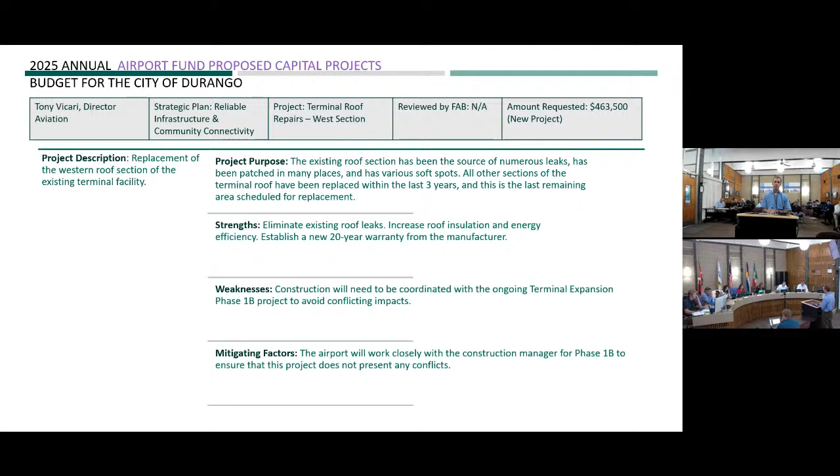Next new project is terminal roof repairs. This is the west section of our roof. The roof on the existing terminal building is basically 3 sections: east, middle, and west. The east and middle sections have both been fully replaced in the last 3 to 4 years, so we're moving on to the last section, the west section. That's an aging piece of roof, starting to see some additional leaks and other challenges, and we felt like this was an appropriate time for us to replace that membrane roof on the west section of the existing terminal.

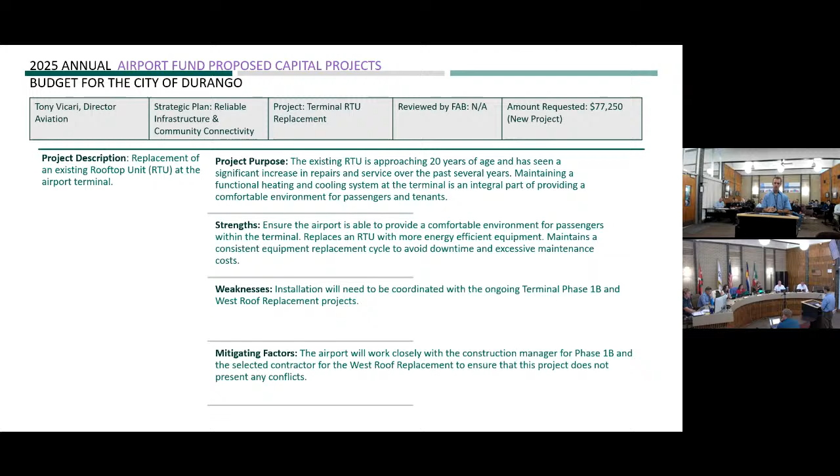Next up is the terminal rooftop unit replacement. Simple project—this is ongoing maintenance, or rather replacement, of core infrastructure at the airport. This is replacing a rooftop HVAC unit that is aging, close to 20 years of age, seeing increased issues, and received a recommendation from our outside contractors to ultimately replace that unit, continuing upgrade replacement cycles for the core HVAC systems at the airport.

Next is the fire station septic system repairs, continuing that trend of maintaining existing systems at the airport. We maintain a separate fire station and maintenance facility, to the south of the terminal. It's not connected to our wastewater system given the topography, and is on its own independent septic original to the 1992 construction of that building. It's aging and in need of replacement for the septic tank and leach field. This project would replace those and right-size them for the current occupancy of the building.

Last is the same facility, the aircraft rescue firefighting and maintenance facility at the airport - installation of fiber optic to that facility. Currently it operates off a wireless link for internet given its distance from the terminal and existing fiber. But over the last year we've seen fiber extended because of outside development, first to the La Plata County radar station at the airport, and most recently through an easement approved by council to a private entity, our fixed-base operator, pulling fiber to within shouting distance of the fire station. So we're looking to extend that fiber down there and bring better internet speeds and connectivity to that station, a critical place where the majority of airport staff, including security and fire personnel, work. That's the rundown on proposed 2025 airport projects.

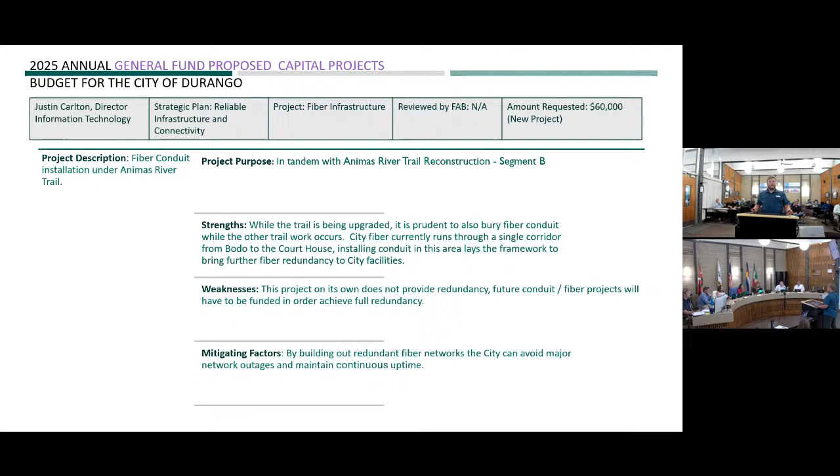Today, the wastewater treatment plant only has 1 physical fiber connection conduit coming in. And in all major city facilities, we try to provide redundant connectivity so that in the event of physical disasters such as a backhoe cut, the facility remains connected. So that's our recommendation for this project.

Moving on to the second IT project for 2025, our backup platform was installed in 2020. It has reached the end of its 5-year life cycle. So in 2025, it's our recommendation that we not only refresh this hardware, but we also go out to the market and look for upgraded capacity so that we can more frequently take backups, more securely take backups, and also investigate additional technologies such as cloud backups and offsite backup. And with that, I'll turn it over to Jacob.

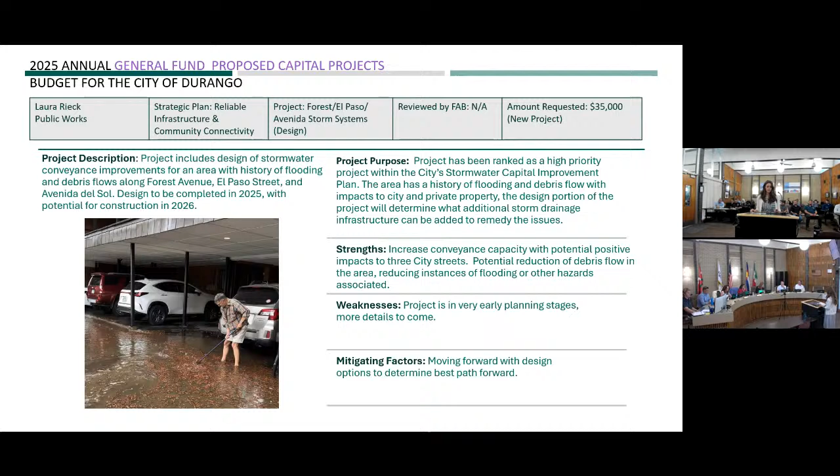Are there any questions about the general fund before we move forward?

So just real quick, we received an email, gosh, probably about a month ago, about a storm drain on Rio Vista. Will that be a part of, I don't know if that's even near the Forest El Paso and Avenida project. I've brought our city engineer with me for any stormwater questions, so I'll turn it over to Keith to answer that question. Good afternoon, councilors. I'm Keith Doherty, the city engineer, and no, Rio Vista is not part of that system.

Has that been looked at at all? Or is it just certain storms that impact that area? For this particular one, for the Rio Vista circle, no, I don't believe Rio Vista is on our 5-year CIP right now. Okay, but I can check on that and get back to you. Okay, thank you so much.

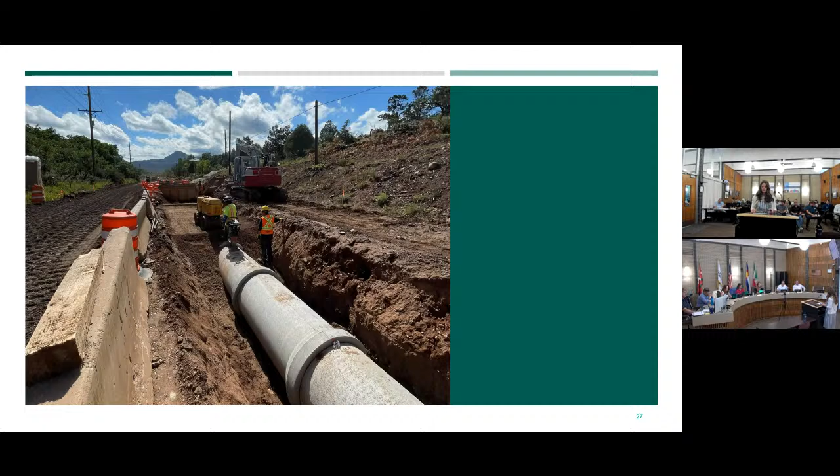Sure. Any other questions on the general fund from anybody? All right, okay, moving on. All right, 2019 Streets Fund summary. This is a picture from County Road 250, 251.

First is the maintenance transfer. This is a transfer of funds from the 2019 sales tax fund to the general fund to supplement operational expenses for the streets division of Public Works. Per council direction, this fund has been reduced from $1.7 million to $206,000.

The County Road 250-251 project is going to continue into 2025, starting construction back up in the spring after a winter shutdown. This portion of the project will begin reconstruction of the Metz Lane intersection and short sections of County Road 250 north and south of that intersection. The additional funding request for 2025 is to help cover the 10% contingency and 5% construction management costs that were not originally included in the project costs.

This project is jointly funded with the county. Their portion totals $4.4 million and will be contributed from the general fund. These funds will be used to pay the city for the annexation of the road, not for the road reconstruction, as general funds cannot be used for road construction. The general fund will then be reimbursed by the county.

This project has significant impacts to the traffic flow on a main thoroughfare through the city. So we will continue to work closely with the contractor and provide the public with the most up-to-date information for any changes to traffic patterns or any road closures that might occur.

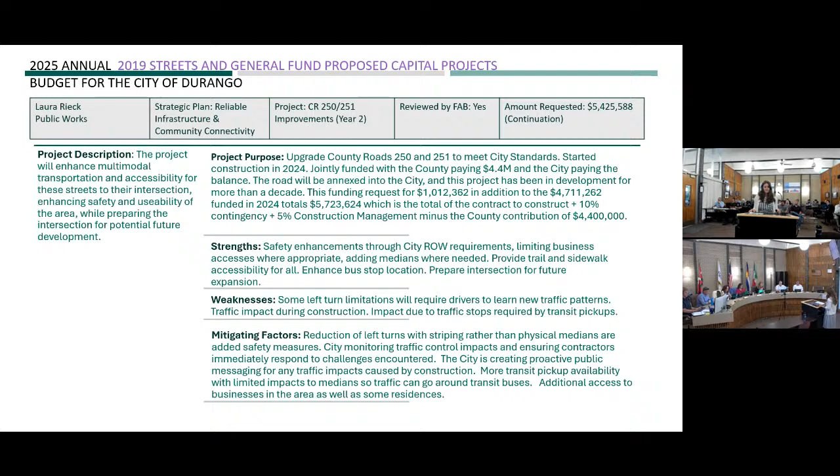Mill and replace is part of the annual pavement preservation program and includes milling and paving off of a road, usually 5 inches deep, repairing any areas of the road subbase that require it, and replacing it with new asphalt. The streets in Durango were recently analyzed to assign a rating using the Pavement Condition Index, ensuring that streets with the worst pavement condition are prioritized for projects. This program extends pavement life and reduces maintenance costs on the worst pavement condition streets. There will be some disruptions while the work is being performed, but the city will utilize proactive communications to inform the public.

North College reconstruction is also going to continue into 2025, starting construction back up in the spring after a winter shutdown, with the continuation of installation of stormwater conveyance and stormwater quality structures, sidewalks, traffic calming features, curb and gutter, and finally paving the road. Like the 250-251 project, it also has significant impacts to traffic, so we're going to continue updating the public with proactive communication efforts.

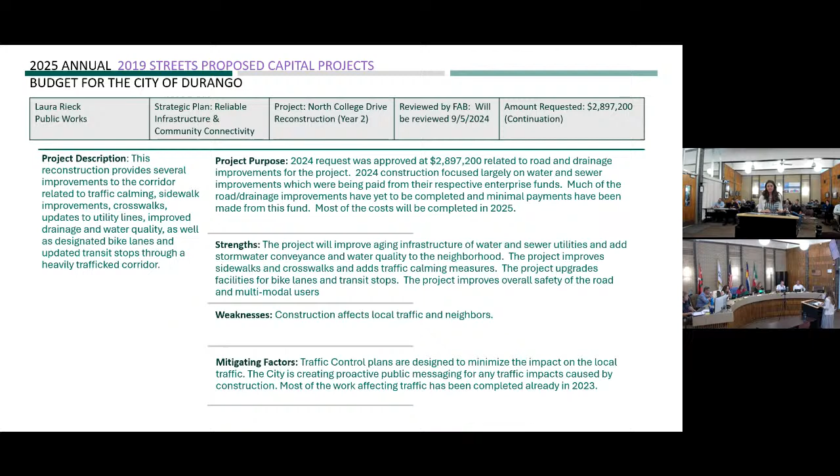Alley reconstruction and paving is an annual program for paving and repaving alleys that are either unpaved currently, severely damaged, or will be receiving drainage upgrades. The alleys are prioritized based on their condition, and this project is for paving only. Adjacent properties won't have access to the alleys while construction is underway, but we'll ensure impacts are minimized by working during normal business hours and using proactive public messaging to inform property owners.

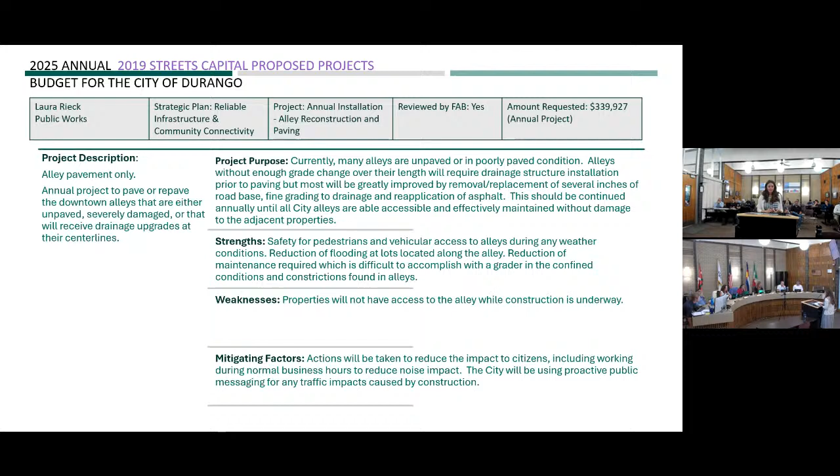So while the last slide was pavement only, this one is drainage only. The alley drainage contract is an annual program to install stormwater drainage structures in the alleyways to reduce flooding and damage to the alleys and increase safety for pedestrians and vehicles throughout the year. The alleys are again prioritized based on drainage conditions, and this one is for drainage only. Adjacent properties again won't have access during construction, but we'll keep close communications with property owners and inform them of the impacts.

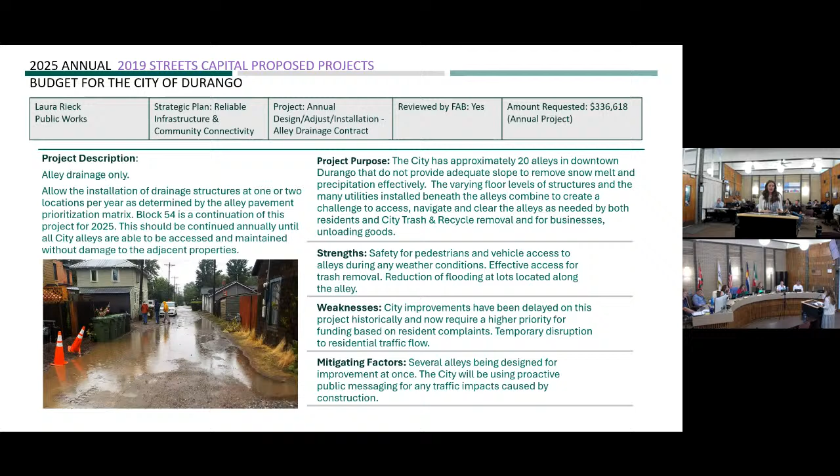Upon completion of the multimodal traffic calming features on Junction Street, approximately 2,000 feet of pavement will be milled to full depth. Any subbase that needs replacement or repairs will be repaired, and the pavement will then be replaced. This project is again only for the paving portion of the greater Junction Street multimodal project, and it has significant impacts to traffic because this is another thoroughfare in Durango. So we'll be using proactive public messaging to inform the public of traffic impacts, changes to traffic patterns, or potential road closures.

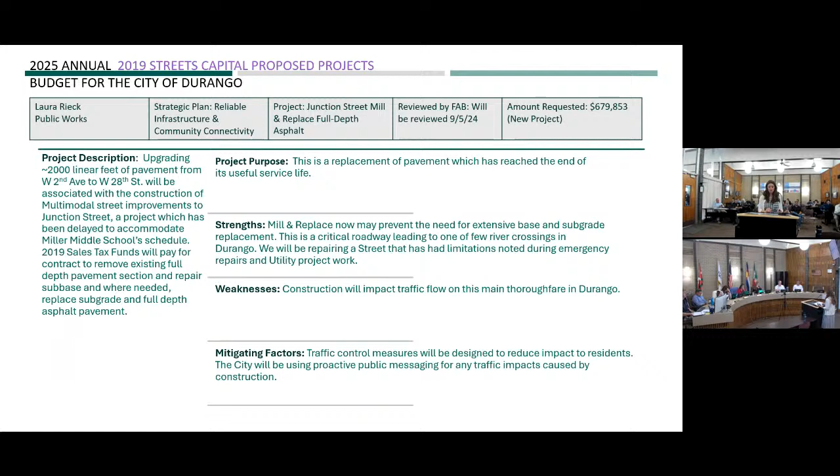The 8th Ave and College intersection and streets improvement project is part of another larger multimodal traffic calming project similar to Junction Street. It's a coordinated effort to group a paving project together with a multimodal project in sequence, which makes the project much more attractive to contractors for bidding. This portion of the project is for the intersection paving only, and it is a reappropriation of funds from 2024 with an increase in the requested amount due to increased costs for asphalt, as seen through multiple bidding processes. The multimodal team will discuss this project and its reappropriation of funds in greater detail during their presentation.

During construction of this project, again, significant impacts to traffic. It's a very busy intersection leading up to the fort. So, again, proactive public messaging will be utilized.

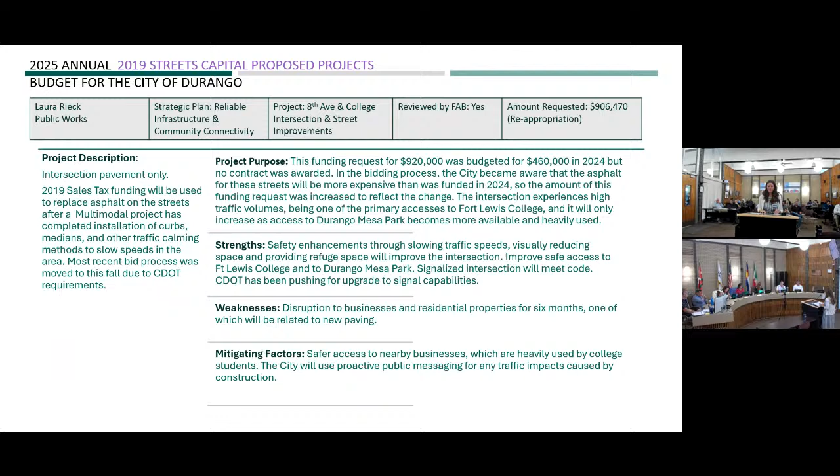This portion of the sidewalk improvement program is an annual program for repairs to privately owned sidewalks, previously known as the 50/50 sidewalk program. After receiving feedback from residents and council, Public Works will be presenting several alternatives to council moving forward for a larger scale sidewalk improvement program. This project will remain in place until a revised sidewalk program is considered and approved by council.

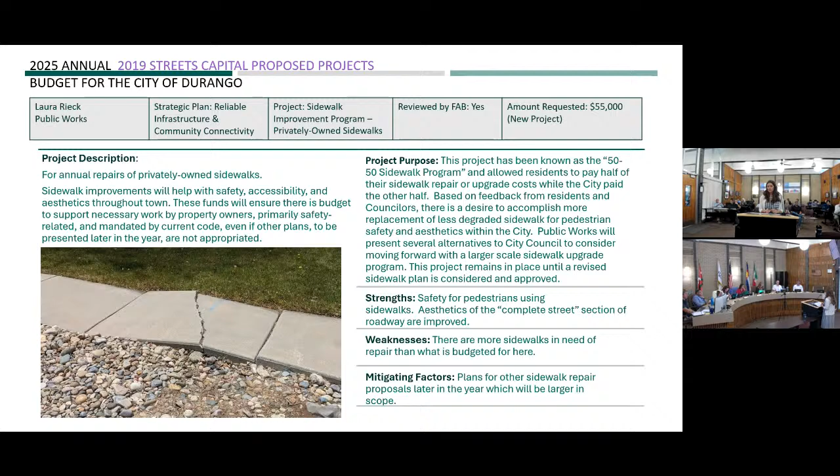Similarly, this portion is for city-owned sidewalks, funding annual repairs to sidewalks that are the city's responsibility. Again, after being presented with multiple options for a larger scale sidewalk improvement program, this will remain in place until one is considered and approved by council.

Annual seal coat application is part of the pavement preservation program, a preventative maintenance method which extends pavement life by reducing water infiltration, sun, chemical, and sediment damage. It's a primary method for pavement preservation due to the life extension per cost per square yard—basically more bang for your buck. Streets needing seal coating are prioritized based on the Pavement Condition Index, or PCI. There will be temporary disruptions while the seal coat is applied, but it's typically only 24 hours that you can't drive on it.

We'll work closely with the contractor for scheduling and ensure the public around the affected areas is notified well in advance.

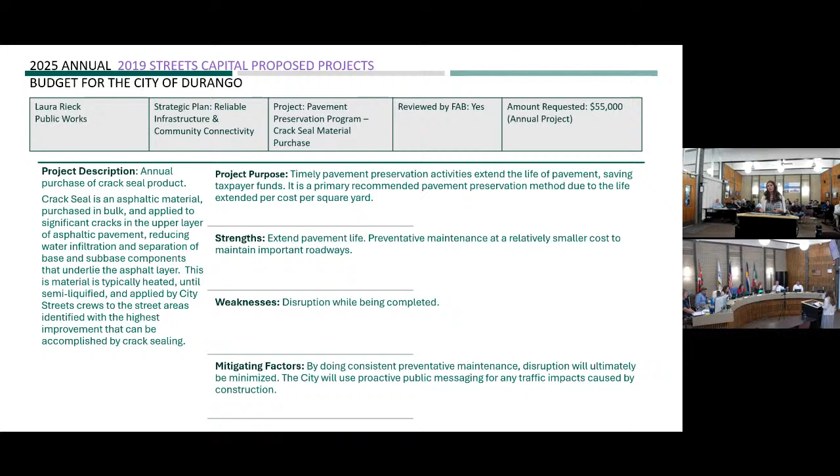Similar to seal coating, crack seal is a primary preventative maintenance method used to extend the life of pavement. This is an annual program to purchase and apply crack seal products to the streets as prioritized by the PCI, the Pavement Condition Index. Again, minimal impacts due to the areas affected, and we'll use public messaging to inform those impacted areas—very similar to seal coat, very temporary impacts.

This is an annual program for the installation of concrete ADA ramps. These installations take place in conjunction with pavement replacement projects, which are prioritized based on the PCI, and they increase safety for pedestrians and those living with disabilities attempting to cross the streets. While not all ramps in the city are being updated at the same time, this program ensures continual replacement of all the ramps in the city until they're all in compliance with ADA standards.

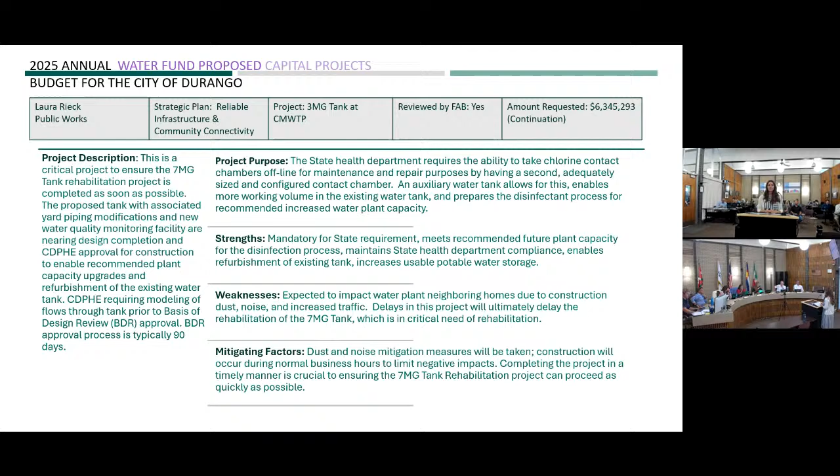And next, 7 million gallon tank rehab. As mentioned in the last slide, the 60-year-old 7 million gallon tank at the water plant needs a full rehabilitation. A recent comprehensive tank inspection revealed the interior coating in the tank is failing, which is a sanitary defect according to the Colorado primary drinking water regulations. This means it needs to be replaced as soon as possible to meet drinking water regulations.

The project is for the design of the rehabilitation and will include replacement of corroded internal steel structure, removal of the interior coating, performing any required repairs to the tank's interior, recoating the inside, and installing features to improve the tank's performance and safety, as well as bring it up to city tank standards. The design of the rehab can be completed in 2025, but the rehab can't start until the 3 million gallon tank is commissioned in 2027.

I should note that although the interior lining is failing, it does not mean that the water inside the tank is not safe to drink. There's intentionally chlorine residual inside the tank to help protect it. It just needs to be replaced as soon as possible because it could lead to corrosion, which could lead to a leak inside the tank.

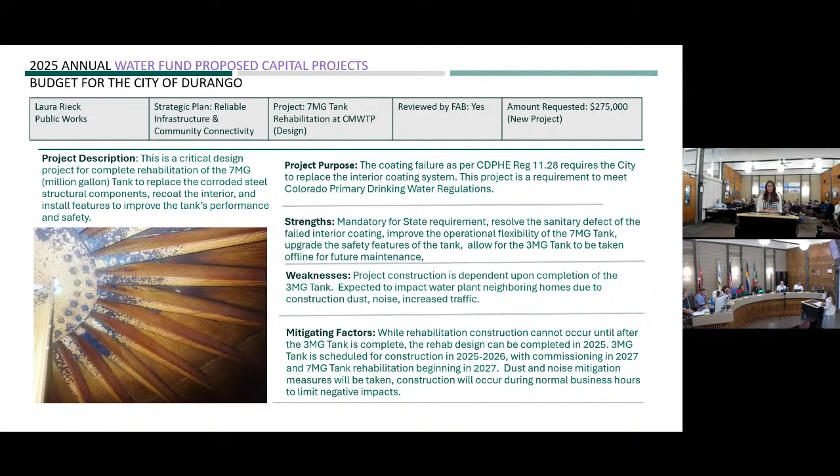Okay, it's the College Mesa Water Treatment Plant Train 1 improvements. The original treatment train was constructed in 1956. It's been online ever since, and it has reached the end of its useful service life. It's undersized to treat the water year-round without the help of the other treatment train, and the concrete structures are literally crumbling apart.

The 2021 Water Master Plan identified the need to expand the water plant from 14 million gallons a day to 21.5 million gallons a day to meet projected future water demands. Improvements to Train 1, or T1, can help achieve this by expanding sections of the treatment train.

And we've begun preliminary engineering and a feasibility study to determine how to best achieve improvements to Train 1 while maintaining daily operations of the plant, as it's the only water plant that we have and it can't be taken offline. This project will fund the design and engineering in 2025 and will outline the phasing for improvements moving forward.

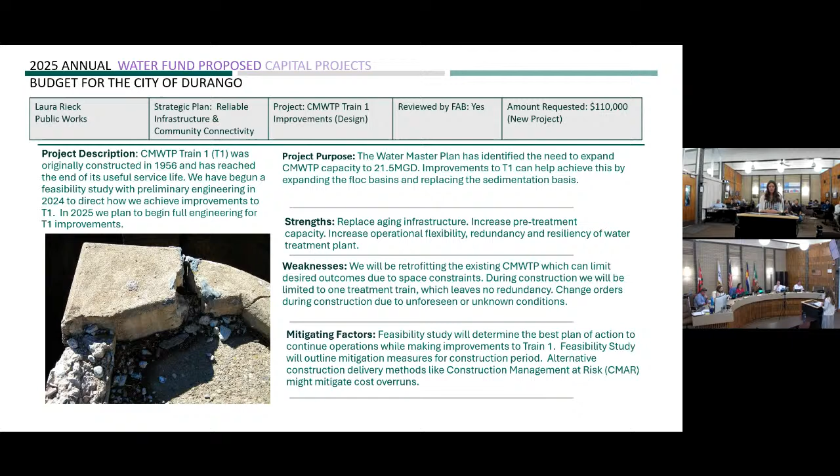Florida Pipe Rehab. Our drinking water comes from the Florida River through a 9-mile gravity pipeline. The pipeline was constructed in the early 1900s and has been replaced in sections over the years, with a section of wood stave pipe being removed just a few years ago. The pipeline is a critical piece of infrastructure that's aging and has experienced several breaks in the last few years, which have impacted our operations for as long as 3 weeks while the repairs were completed.

This is a reappropriation of funds from 2024 because the scope of the project has increased, not to just rehab a few sections of the pipe, but to complete an entire pipe conditioning assessment of the entire 9 miles of pipe to determine the worst areas, identify the pipe materials, as it's a bit of a Frankenstein with different sizes and materials throughout it, and to recommend the best methods for rehabbing the entire pipe so that we can ensure reliable delivery of Florida River water to the plant.

During the construction of the project, which is estimated to begin in 2026, the pipeline will need to be taken offline for rehab. So we'll be utilizing the Animas River as our source water for drinking water during that time, and we'll be utilizing the recently completed pre-oxidation system to help treat this water during the winter.

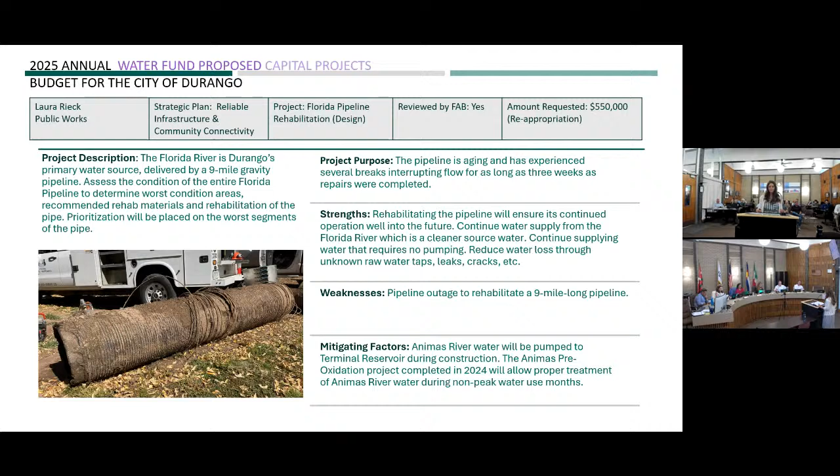The Florida pipeline runs through a drainage area in Edgemont Ranch, and over time, the earth covering a section of the pipeline has been washed away, exposing the pipeline and undermining the ground beneath it. This project will restore the drainage channel grade under the pipe and armor the surrounding areas to maintain soil over the pipeline and prevent further erosion from exposing the pipe.

The project will occur in a challenging area within this drainage channel, so the city and the contractor will determine the best methods to prevent further damage to this channel during construction.

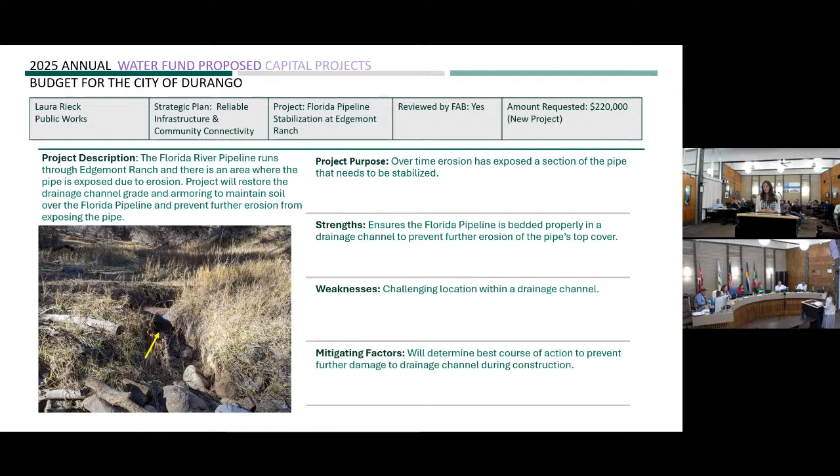The water line along Highway 160 was installed in the 1960s and is in extremely poor condition. We've experienced several breaks each year on the section between the 550-160 intersection and Tech Center Drive leading up to the Recycle Center. This project is a reappropriation of funds from 2024.

The original request was for $2.2 million for construction. However, the preliminary designs did not reach 90% before they were determined to be non-constructible due to the difficult location of the water line being underneath the concrete panel highway, in a congested utility corridor, in CDOT right-of-way, at the base of a really steep slope, right along the highway.

So a new design is needed to account for these challenges and to incorporate alternative methods of pipe replacement, and to ensure that it reaches 90% design for construction in 2026.

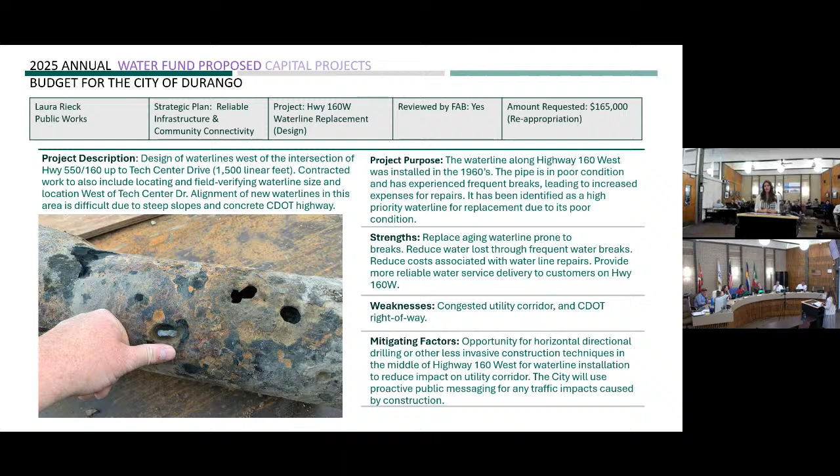This project is a continuation from design completion in 2024, with construction occurring in 2025. The Rockridge Pump Station was built in 1990 and has reached the end of its useful service life. The pump station is undersized and it lacks the necessary updated equipment to enable us to take the Rockridge tank offline for needed interior rehabilitation.

The 2021 master plan identified this pump station as needing to be replaced with a station with increased capacity, modern controls, and backup power generation so we can continue to deliver water even during power outages.

A new pump station is a prefabricated building that will be placed next to the existing pump station. It's going to include updated pump controls and communication systems that are standard in our other pump stations.

Construction will occur along a popular walking path and in the middle of a very quiet neighborhood, so this is going to impact the nearby residents. Again, typical noise and dust mitigation efforts are going to take place, and the neighborhood will be informed well in advance of the start of construction.

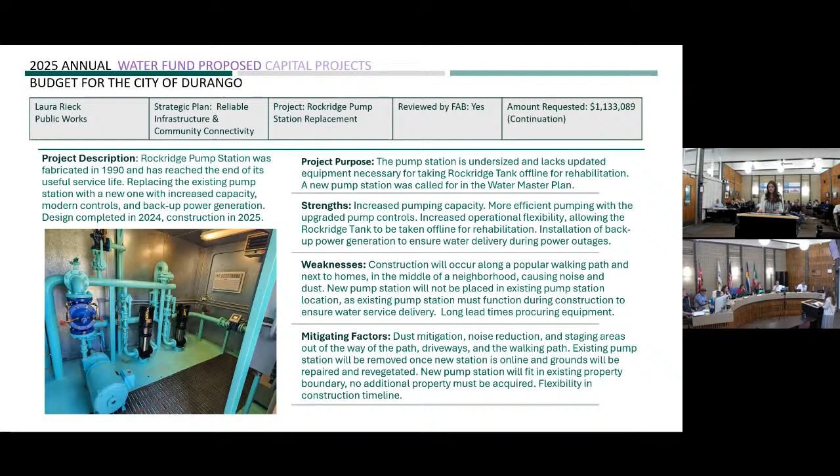Wildcat Tank needs full rehabilitation to meet drinking water regulations and to bring it up to the city water tank standards. Phase 1 of the tank improvements were completed last fall, which included the installation of an isolation valve halfway up to the tank and running power to the tank site.

A recent comprehensive tank inspection revealed that the interior tank coating is failing, which, like in the 7 million gallon tank, requires removal of the old coating, repairs to the internal steel structure, and recoating the inside.

Phase 2 will include full interior and exterior rehabilitation, as well as the addition of our standard tank components, which are a new safety ladder and cage, security cage, handrails and roof hatches, a tank mixer, sampling ports, level sensors, communications, a control panel, and power to run it all.

This project is dependent upon CDPHE approval of the design, and it's dependent upon the Twin Buttes developer upsizing the water main on Highway 160 from Tech Center up toward the gas station. This will allow us to take the tank offline, as this tank is currently needed to supply water to the Twin Buttes pump station to fill the Twin Buttes tank.

The developer is currently in the design process for upsizing the line, and the tank's rehab design is expected to be approved quickly by CDPHE because it's the same design as other tanks we've already done.

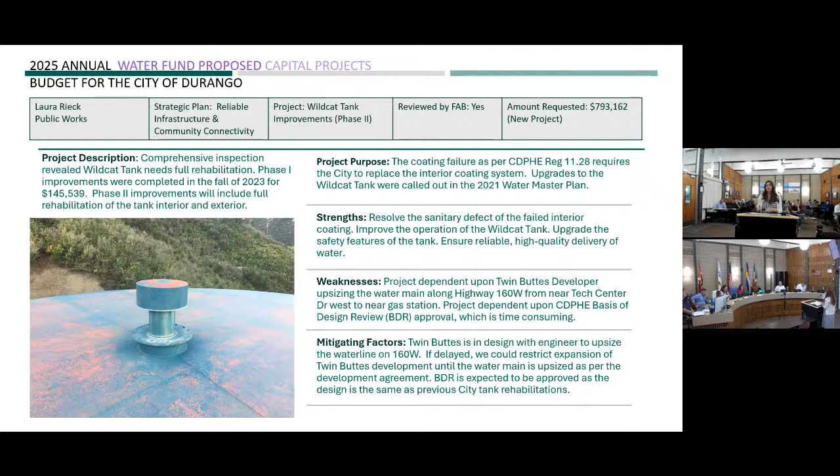Durango Mesa Park Access Road has a planned 8-inch water line running to the top of the mesa to supply potable water to the mesa. Public Works has the opportunity to upsize this main to a larger size, and this would support a future opportunity to loop the water system to Grandview Tank, which serves Three Springs and Mercy Hospital.

Looping this area of the water system would ultimately provide redundancy to a critical portion of our water system, which currently relies on a single pump station to deliver water to all of Three Springs. We'll need to analyze future pumping capacity needs based on our existing pump station and future potential equipment upgrades.

However, there's advantages to purchasing the pipe now because material and installation costs just keep rising.

Skyridge tanks are twin 10,000 gallon tanks that are buried on the hillside above the Sky Ridge neighborhood. They're just east of the above ground Hillcrest tanks. They are square concrete tanks and have liners inside.

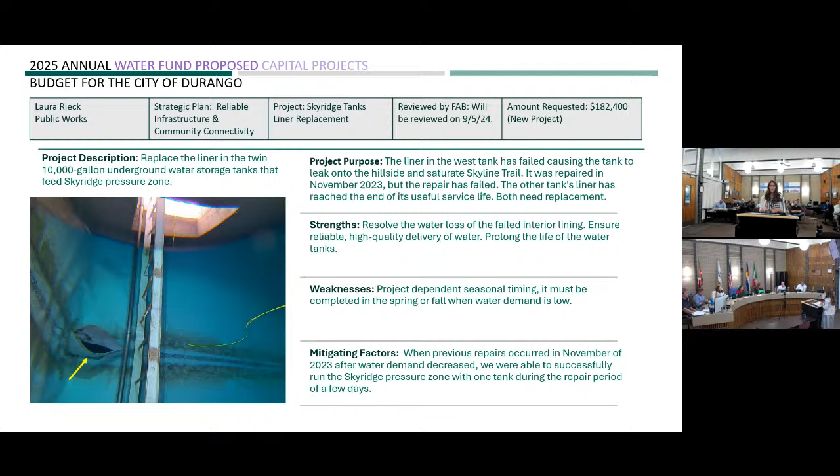The city's already under contract with Riley Industrial for tank repair and maintenance, and they're able to replace the liners early in spring of 2025 before water demand increases for next summer. The project is timely since we need to stop the leakage from the tank as soon as possible, but the work needs to be performed when water demands are low so we can take one of the tanks offline at a time.

Water fund questions? Yeah, just a couple, thank you so much. It's a ton of information.

The 3 million gallon tank, after the 7 million gallon tank rehab project is completed, will that increase our capacity, or will it be used as backup? There are multiple ways we can use it. We've engineered it so we can use it in any situation, whether just using the 3 million gallon tank, just the 7, or using them together. There's a design in place with inlets and outlets that allow for that usage, but it's also designed to create more contact time with the disinfectant. So whereas the 7 million gallon tank handles that right now, we'll be able to do it in the 3 million gallon tank because there's a maze inside it that the water has to travel through.

Thank you. Regarding the Florida River Pipeline, how long do we anticipate that project taking, since we'll be pulling from the Animas? For construction or design? Either one. I know we're not close on the design yet, but do we have a forecast? It's estimated design will be in 2025, construction in 2026. For the actual timeline where we'd have to shut the pipeline down, I couldn't say exactly, but I'd guess 1 to 2 months, depending on what method they use for the rehab. Okay, I figured it was probably too early to tell, but wanted to ask in case anyone was wondering.

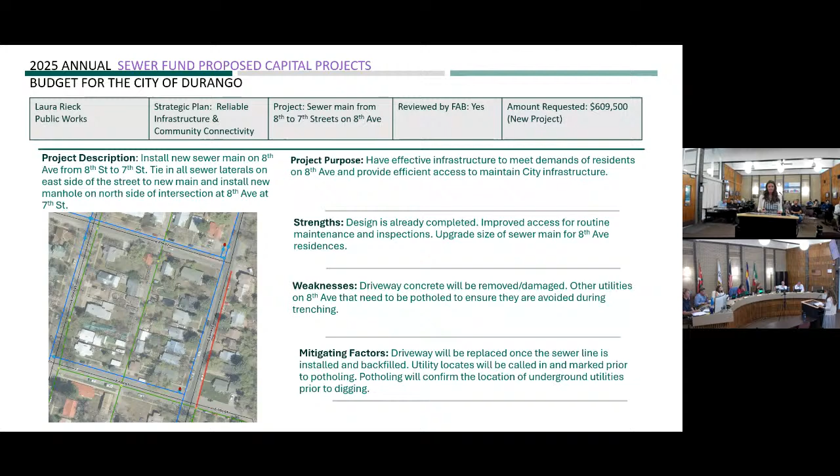From that manhole, the wastewater from Riverview neighborhoods and all along Florida is stuffed into a 6-inch pipe that flows west and north to the Island Cove lift station. This creates a bottleneck and can lead to clogging in the sewer lines.

The 6-inch line needs to be upgraded or upsized to a 10-inch to remove this restriction and allow for proper maintenance of the sewer lines, including rodding and camera work. It's going to reduce the likelihood of clogs and sanitary sewer overflows.

There are 7 mobile homes sitting right on top of the existing sewer line, so there's an opportunity to use alternative pipe placement like pipe bursting technology to replace the line going underneath those homes.

Their sewer service would, of course, be interrupted during this time, but the city has established mitigation efforts like offering rec center passes and providing temporary restrooms during construction. The affected areas will be notified well in advance and kept up to date on all construction progress, and the public will be notified of any impacts on Florida Road.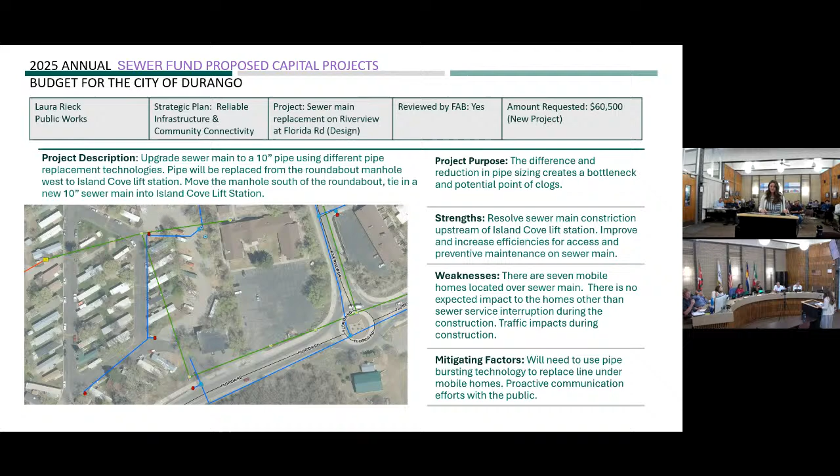The pumps that are too large, is there a way to downsize from 3 to 2 pumps, or do we need to go to a smaller pump? And are we going to keep those larger pumps to facilitate growth if need be? I'm unaware of what we're going to do with those pumps once they're taken offline, but typically only one pump runs at a time, and even with one pump online, it's too much. It's way oversized for the need that we have.

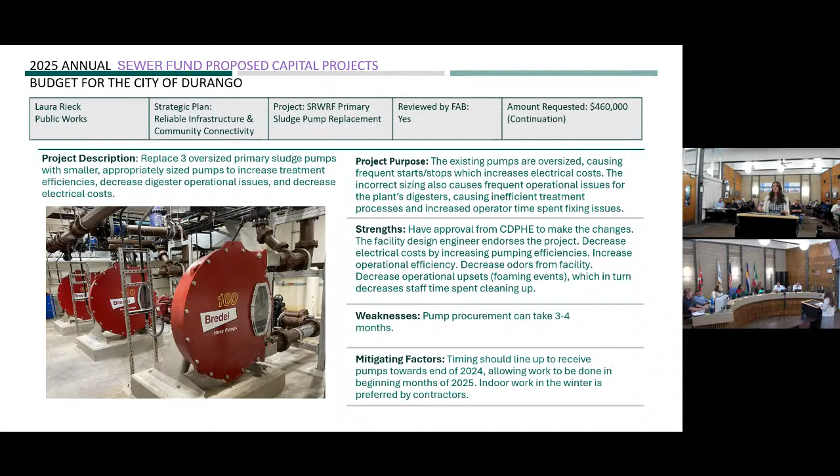And the concrete liner replacement, are we going to be able to recoup any costs from the company that installed it? Unfortunately not. The warranty for the original liner was only 1 year, which is typical for contractors. With Spectra Shield, the contract we currently have, the wastewater treatment plant manager went through a lot to make sure the warranty would last much longer than 1 year. I believe he told me it was 10 years, but we'd have to double check that.

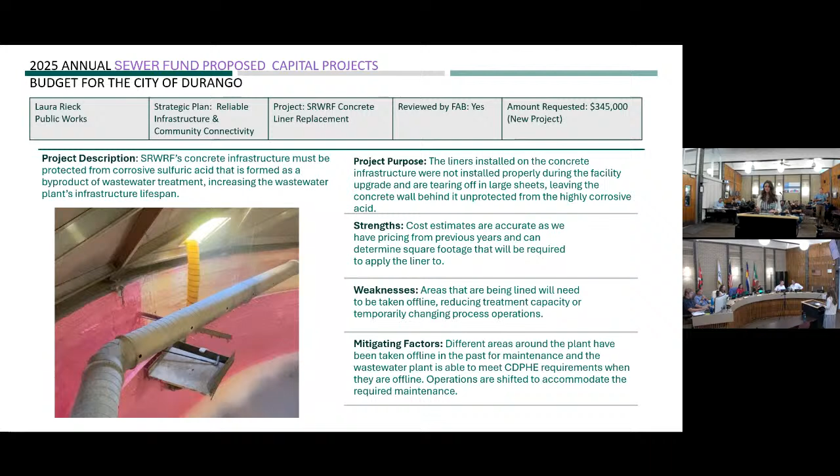Good afternoon, Mayor and Council. Scott McClain, the Assistant Parks Director. We'll be talking about the 2005 and the Parks and Recreation 2015 funded projects.

To start with, on 2005, the first project is an annual project. This helps cover our maintenance costs for parks and open space projects that have occurred since the 2005 tax went into effect. We have unit costs that we put to square footage that help determine and cover our day-to-day maintenance costs on those facilities that we've built with the 2005 fund.

The next project is our irrigation replacement at Greenmount Cemetery. This is a continuation - if you recall, we had funding for 2024 for design and construction. We've been working on design and are in a place to do the first phase as we started getting into the details, looking at sequencing and scheduling. It made sense to divide this project into two phases.

The first phase is the water line replacement from the Animas River up to the cemetery. The cemetery is irrigated with raw water, and the water line in place is aged beyond its useful life, so we want to get that taken care of. This also helped us when we had the opportunity with Buckley Park to have the additional funding we needed to acquire Buckley. So in 2025, we're set up to go to bid for the water line.

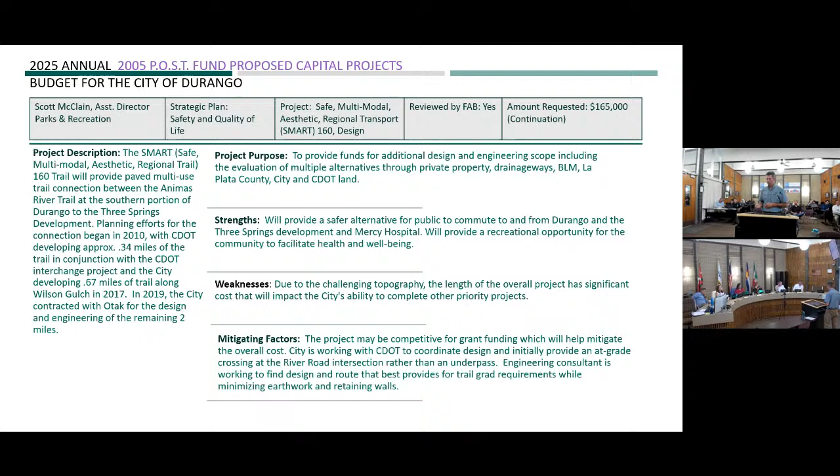Durango Mesa Park is another project where for 24, we had one general project that covered a lot of different pieces. So the next number of projects are Durango Mesa, but more specific pieces of that. Some of those were in the 2005 tax, and then we also have some of those in the 2015 tax.

The first one is the hub development. If you've been up in the Horse Gulch or the demonstration trails, most of the hub is completed. So a little bit of work that we're going to finish this year, need to pay for in the beginning of next year, and looking at making the service road that we put in there. This will help provide vehicle access to the top where the hub is. One of the flow trails was designed to provide for hand bikes, so this will provide opportunity if we have a special event or somebody needed access, they could drive up to the top of the trails and then have access to do laps there with a hand type bike.

The next piece we have for Durango Mesa Park is the bike park design. This is ongoing at this point. Some of the construction work for the bike park will be happening this fall, and the remainder will be happening next year. So this is getting those plans completed and then having design support for the bike park into next year.

We have 2.4 million requested for bike park development. This year we're doing planning to get a service road to the area where the bike park will be, looking at trying to get the connector trail done, and then doing some large scale grading work to get some of the mass earthwork done, then get into the details of it next year.

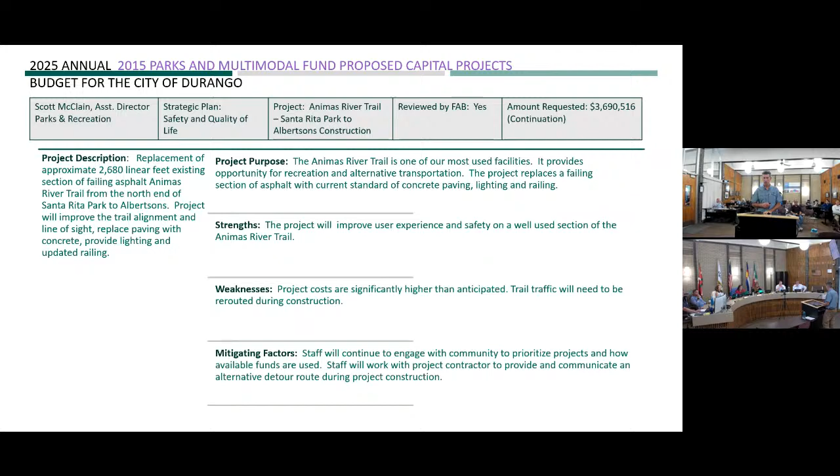The second section of Animas River Trail is the piece between 29th Street and Memorial Park to the Demon Bridge, including replacement of the Demon Bridge. We reviewed the 90% plan, so we're finishing up the design work. We've got 100,000 requested for continuation into the 25. This will provide for any design completion that needs to occur, and also for environmental surveys. Typically the environmental surveys have a time limit, they'll expire. If we get something done this summer, it'll expire and we'll need to do it again next summer, so it makes sense to wait until we're closer to bid and construction to do those.

Same scenario for the section of River Trail from Santa Rita that extends from Santa Rita Park south to County Road 210, the spur up to Nature's Oasis. This also includes a bridge replacement below the highway bridge. That bridge supports a city water line and multiple fiber lines, so we're still working through some design effort. We've reviewed the 90% plans, but there's still some design coordination on relocation, working with the fiber companies on what that'll look like.

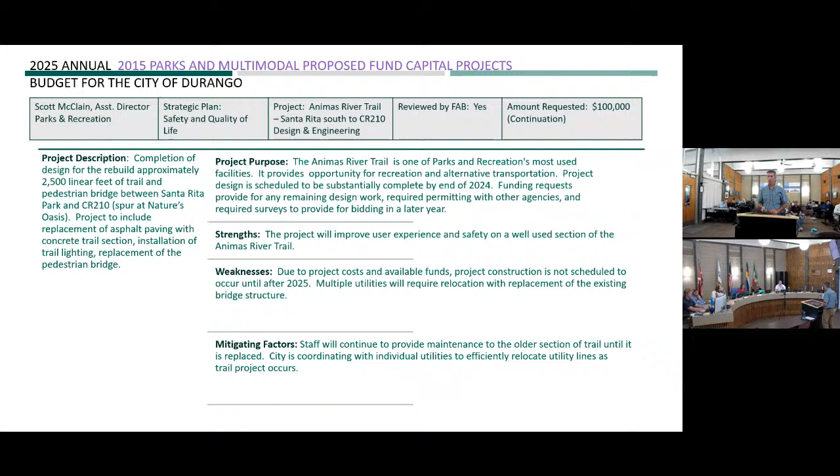Lake Nighthorse, the entry and decontamination station. This project is in progress. The entry is providing new entry buildings and restructuring the entry to the park. Currently, the entry station doesn't provide much backing or stacking room off the county road, so we're moving it closer to the decontamination station to give more space for stacking. It also places the entry booth and decontamination closer together, giving staff a more central place to work efficiently without having to travel as far between points.

As recreation manager, the city is responsible for inspections and decontaminations for aquatic nuisance species. The unit we acquired from the Bureau of Reclamation when we started at the lake is very finicky and takes quite a bit of time to get the water to the right temperature. The new system is the latest that Colorado Parks and Wildlife is using, so it should be a huge improvement for staff, with a bit of office space instead of just the temporary shacks or sheds we have now. That's anticipated to be largely complete by end of the year, with some work extending into the first of the year, and landscaping and vegetation happening in the springtime.

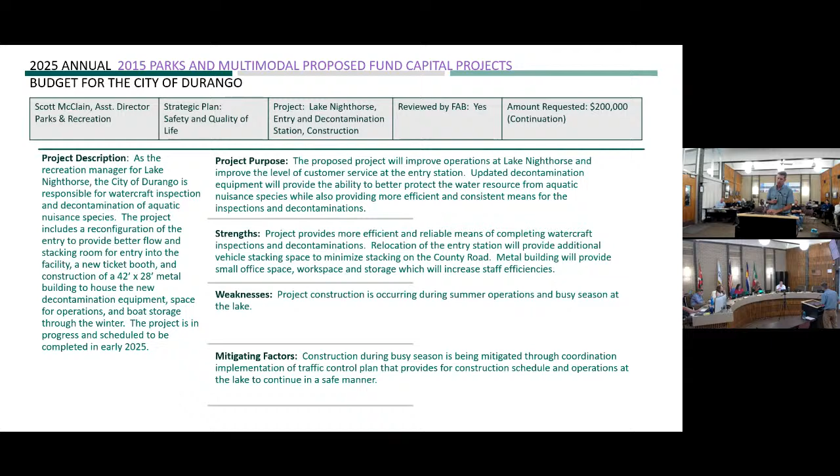The next project, also at Lake Nighthorse, is paving the access road from the entry station to the boat ramp and the gravel overflow parking lot. This is largely funded through a federal highways grant, the FLAP program, or Federal Lands Access Program, aimed at providing better recreational access to facilities. It's about 0.8 miles of road, including drainage improvements, base course improvement and paving, plus paving the gravel lot.

The total estimated project cost is 5.2 million. The city's share is 1.25 million. We've spent 140,000 on the scoping and design portion, and we have just over 1.1 million due in '25. Federal Highways will administer this project, so they'll put it out to bid in '25. It's currently scheduled for construction in '26, though there may be some leeway since they have other projects that might get bumped a year, which could let us move up a bit.

At the Recreation Center, a new project requesting $380,000 for replacement of a HVAC rooftop unit that provides air conditioning for the gymnasium space. Over its 20-year lifespan it's had some issues this summer, so the replacement provides a comfortable environment for patrons of the gymnasium and rec center.

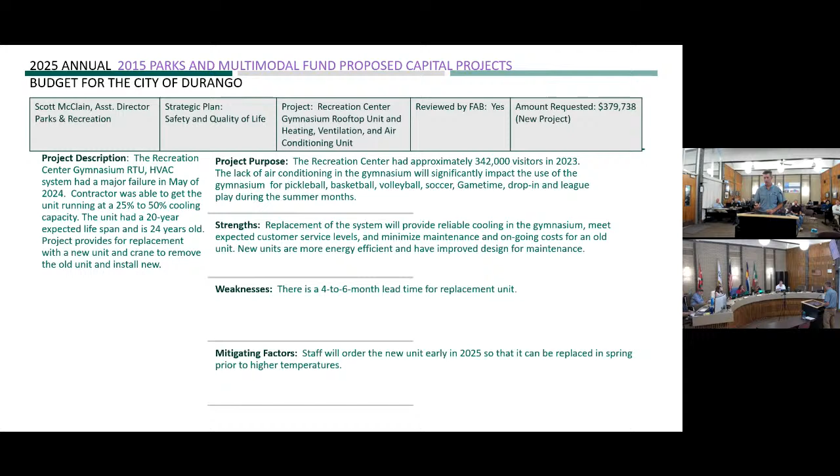At Chapman Hill Ice Rink, a new project for replacing the snow melt pit heater and the bleacher heater, requesting $66,000. The snow melt pit is essentially where the Zamboni scrapes the ice, treats it, and the shavings go outside in a pile. The current setup has a heater tied to the refrigeration unit, so it only runs when the refrigeration runs. Since it's wintertime and an outdoor covered rink, we don't need the refrigeration much, so the heat doesn't run effectively with the current pit. This new unit lets us control when the heater runs, helping eliminate that attractive nuisance and minimizing the time staff spend moving ice melt shavings to another location.

The ice rink itself is not heated, so the bleacher heater is just a small unit that provides heat to the bleachers and spectators there.

Next project is asphalt paving maintenance for the parking lots at both the Recreation Center and at Chapman Hill. The request for that is $100,000, and that is a new project.

Our final project is a request for $50,000 for the Community Forest Management Plan. This has been an annual request to help get additional trees planted and take care of the trees we have within the city. We should be wrapping up the forestry management plan update by end of year, and that plan will help us prioritize how we use our resources in those directions. So with that, I'm going to turn it over to Devin for the multimodal projects, and I'll stay up front here, so if there's questions we can get all the 2015 at the same time.

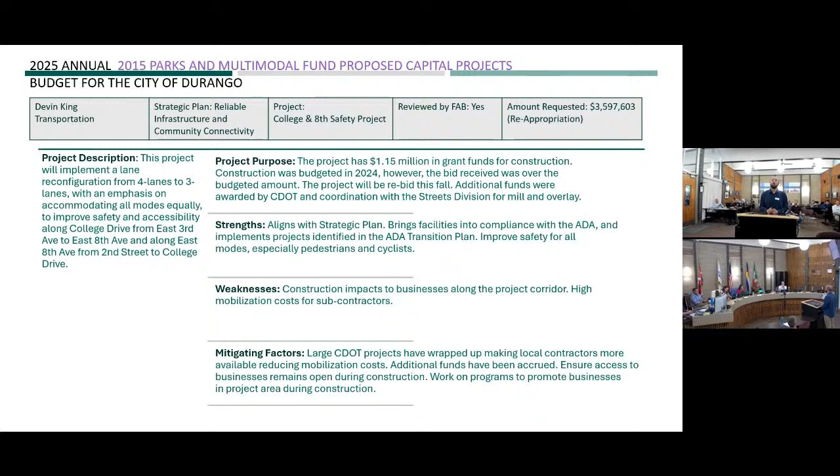We have also secured additional funding. We have streets funding that is added to this amount that will help us get to the construction bid amount. This project is implementing a reconfiguration of College and 8th Avenue. What that means is we're dropping from 4 lanes to 3. That puts in buffered bike lanes. It also is adding sidewalk and getting the transit stops to be out of the travel lane, so it helps us reduce crashes in this area, and improves connectivity for pedestrians and cyclists.

The Midtown Safety and Connectivity Project, staff will be presenting to you later this evening at the regular meeting and providing an update about the project, so I won't go into too much of that, but the project is designing traffic calming features, accessible curb and sidewalks, and a two-way cycle track on East 2nd Avenue, as well as improvements to the 15th, Florida, and 3rd intersection. This is again a continuation of funds. We've been heavy in the design process for the last few years, started off with a traffic study, and we just had recently a 60% public meeting. At this point, we're getting close to entering into the final stages of design, which I will present on later this evening, and then we'll probably be finishing up somewhere in 2025.

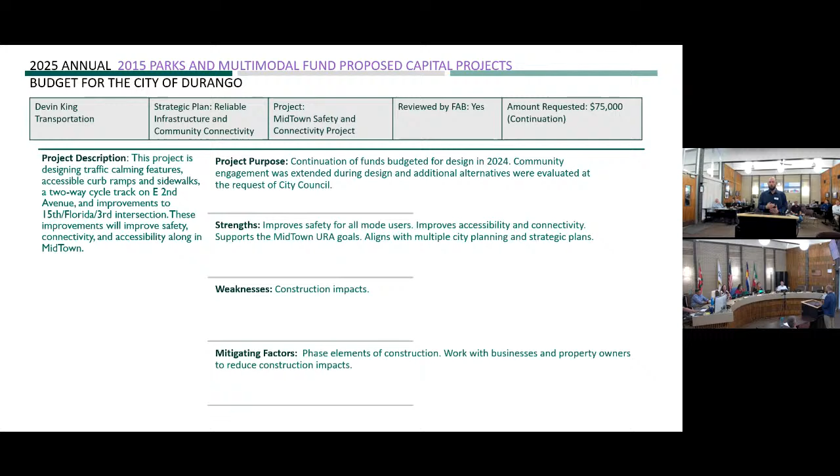The North Main ADA Improvements Project is the sidewalk and transit stop improvement from 17th Street all the way to Animas View Drive on North Main. We've received $4.5 million worth of grant funding for this project. We've been in the process, we finished up the preliminary design, presented that to the public back in June, and now we are entering into the contract for the final design. So this funding is to complete the final design of the project as well as right-of-way acquisition.

There are some areas where we're going to need temporary easements as well as permanent right-of-way, which we've been in discussion with those businesses about and will continue over the next year and a half or so. This is, again, a continuation of these funds to finish out the design of that project, and then construction will likely be in 2026. It will take us a full year to get through the final design and right-of-way acquisition. It's a very long project scope.

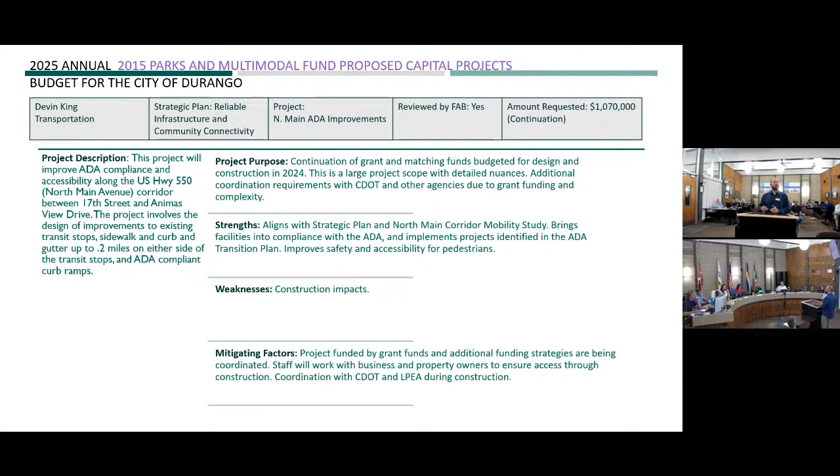Downtown's next step is a continuation specifically of phase 1 and phase 2 funds that have already been budgeted for 2024, and then an addition of funds for phase 3. I'll note that for phase 2 and 3, we have been awarded grant funding from DOLA, the Department of Local Affairs, which gives us basically $640,000 of the $800,000.

So really it's just $160,000 that we'd be spending on these final two phases. With us getting closer on design, we've heard a lot from the public and businesses that they really want to see a cost estimate for the project. Unfortunately, we don't even have the full scope of what we're improving dialed in, because we're still at 30% design, and only for two blocks. Finishing the full design for the entire corridor will give us an engineering cost estimate, including utilities, that we can provide to everybody and then discuss funding and other strategies.

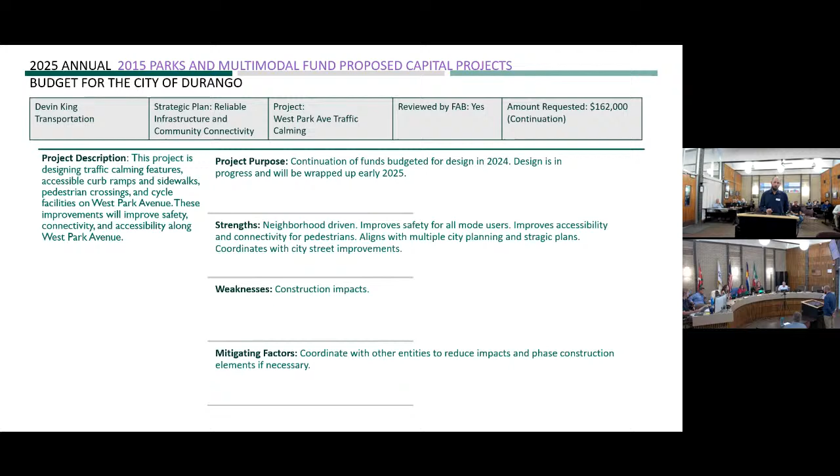If there was a way to show in each of these items how much was attributed towards grant funding, it would be really helpful. In this case, it's showing what looks like $1 million of our funding, but in reality it's $160,000. That's a huge difference, and the public needs to be aware of that, because it's substantial for this and for several other items, also the airport. I don't know if there's a way we can show it, but I think it would be interesting for the public.

Yeah, I think we had to clarify that a few times with the finance team and with people on the phone, so I just wanted to clarify it here as well.

You mentioned in the next steps meeting last week that you were looking at the design phase right now, and I believe you said in your presentation that we're looking at not reducing the size of lanes anymore. Correct. Okay, so people want to see that. They're like, he said it, but how real is it? Does that make sense? They want to see that reflected in the design.

With this design phase that's taking us through to get us the numbers we want, so we can make great city council decisions that are educated and well informed, would it include those options, like seeing the lanes not change, and the length and so on?

Okay, great, just making sure. And then I had one more question on that. It's going to come to me, maybe not. Maybe I'll come back to that. Oh yeah, I remember now.

You said the utilities will be included in the cost, so we'll have a utilities number? Yes, it will be included in the cost estimate. Right now that portion of the project is funded separately, outside of this. But basically they're waiting for this project because we can't determine exactly the utility locations until we know exactly where the sidewalk's going to be, etc. So we need all the pieces solved before we can complete the design.

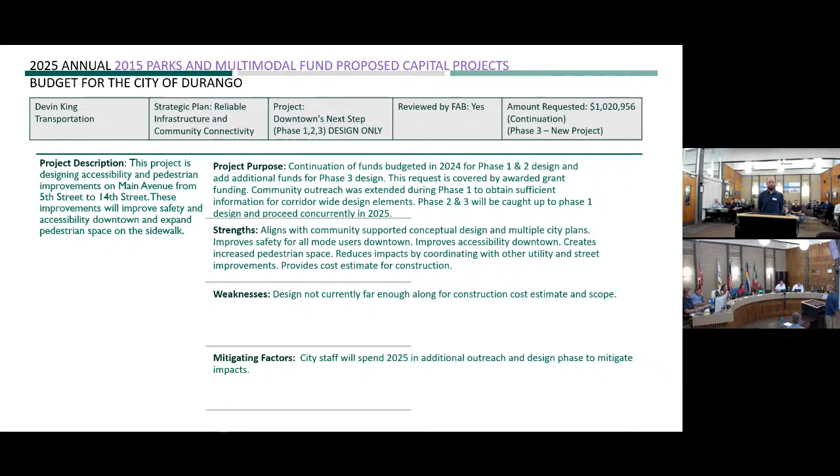Back to Scott. I do have some general comments, maybe to Jose, if I could, on this whole process. One thing I thought would also be helpful in the future, when we're looking at approving the budget in our city council meetings, it might help us to also see the long-term capital project list, so we could see what's heading out for 5 to 10 years.

For example, the Animas River Trail Connect, so we can see where those are in this process. It would just be helpful. We're looking at 1 year here, but if we could simultaneously, in the future when we're looking at it and approving it, understand where the other projects lie as well.

Sure, just so we could see the whole picture, understand the big picture. Right, and since you mentioned that, I'd like to add on. Maybe the same thing with Santa Rita water reclamation center, because it seems like we just did that and now we need to replace stuff there.

So maybe if we had a long-term view of how long this thing will last, since we're already replacing the pumps, because the public doesn't understand the fact that we just paid for it — it just seems like we just upgraded that thing and now we've got to work on it again.